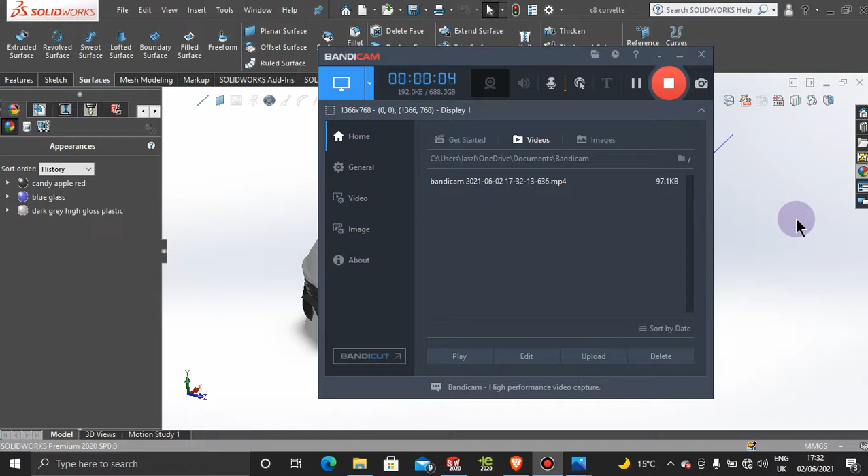Welcome back to C8 Corvette Part 20 Solidworks tutorial. In this tutorial, we're going to create the lower front lip splitter, and then after that we're going to work on this headlight unit here and create the bulbs and these LED strips inside this headlight.

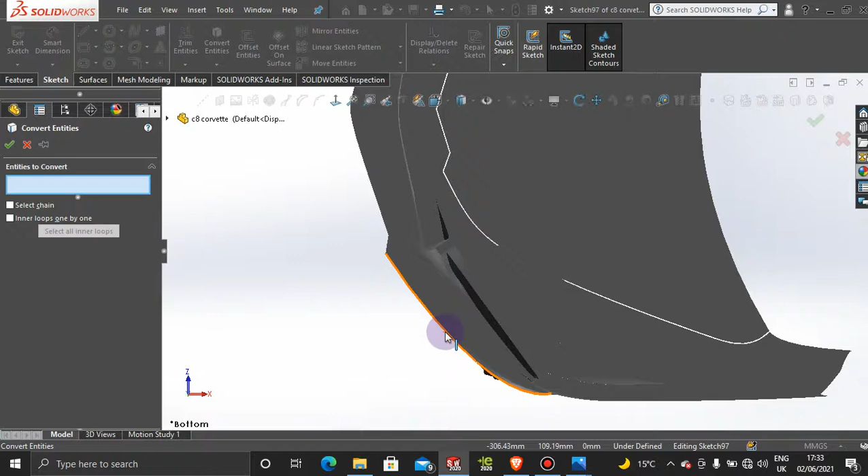All right, so to get started, let's jump to the top plane here and create a sketch on the top plane, and then let's flip into inside out, and let's convert some entities here. So let's convert this one, these edges, and make sure you zoom in here so you grab that small piece in here. Okay, and just jump to this side here and then press OK.

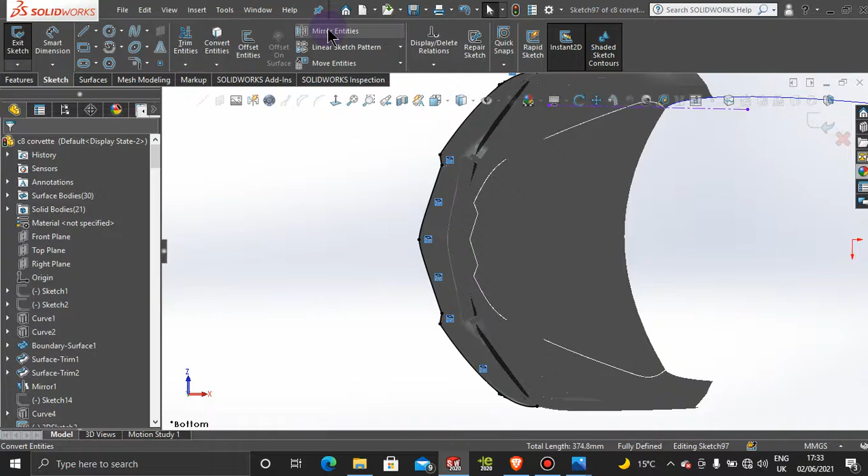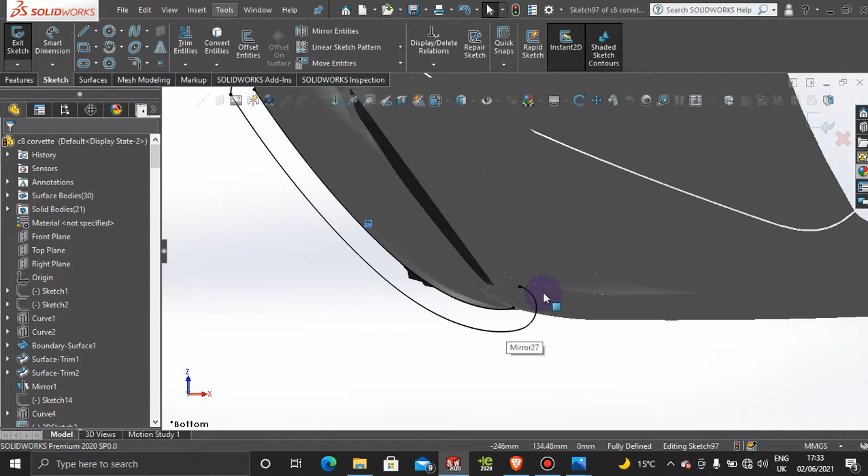And then once we convert these edges, we're going to do an offset. And for this offset, we're going to do a box select, and then we're going to reverse that into 10 millimeter. And what? Let's try a 7. Okay, so press OK, and then you're going to come down here, and then I grab a spline, bring it up to this point, and we're going to add a profile to that curvature.

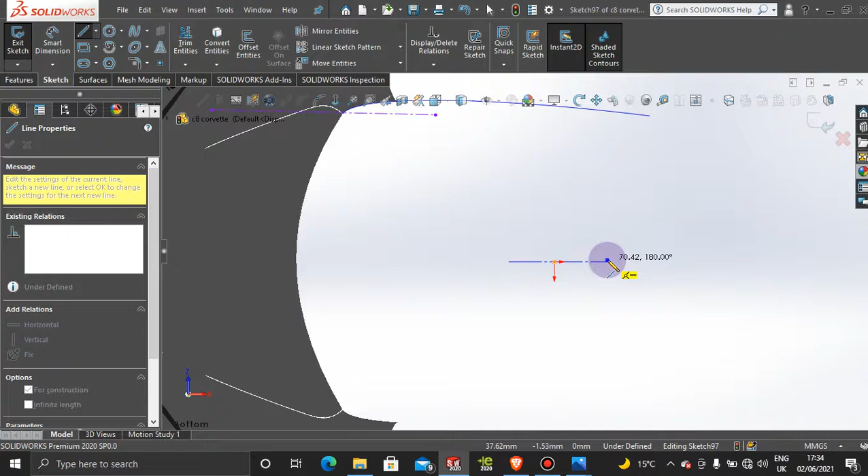All right, and then let's grab a center line, construction line, and then we want to snap onto the middle, and we're just going to mirror over this curvature over this construction line here, and just come in here and snip away some extra curvatures that we don't need here. That's okay, don't worry about that, that won't do anything.

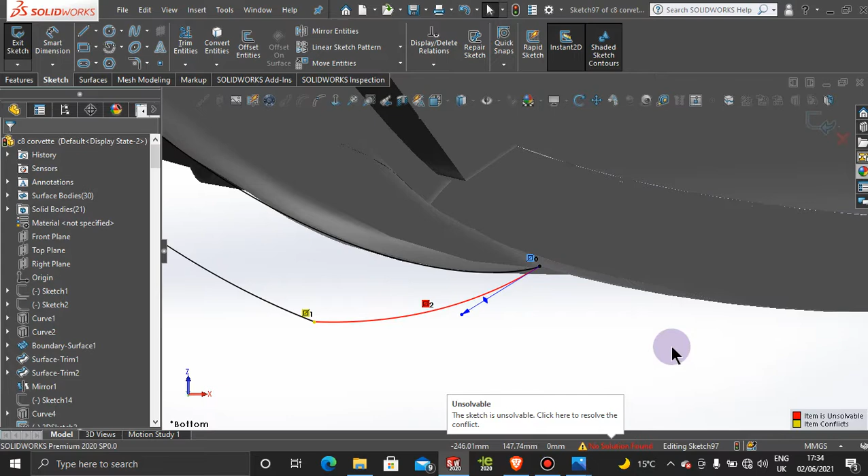Okay, exit the sketch, and then let's come to the front section here.

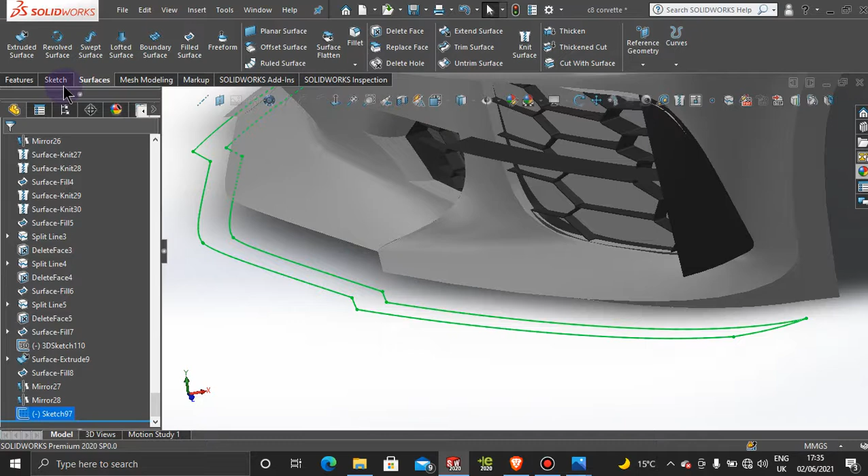Okay, and then in this front section, we're going to extrude these front lower lip section up. So I'm going to do with features, it's going to be a solid object, and then select these contours here and press spacebar, and then just going to pull it down to about here, and press OK.

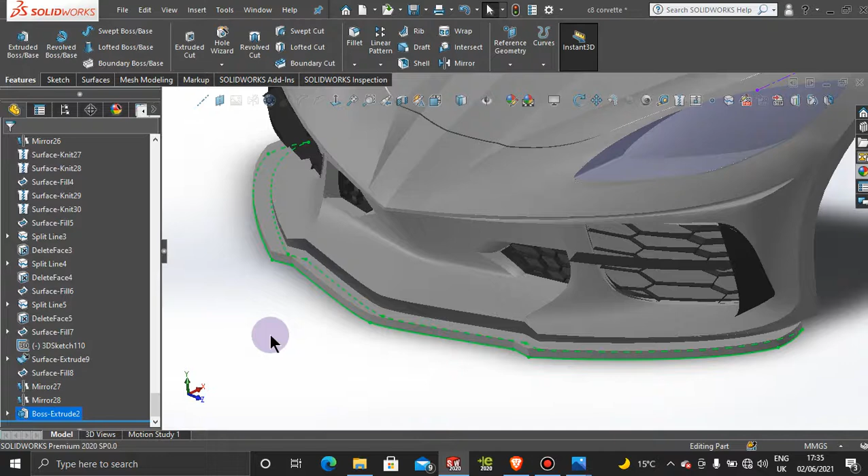All right, so now that we have the front splitter somewhat done, we're going to add a fillet, and let's try 2 on these edges, and 2 looks like it will do the trick for us.

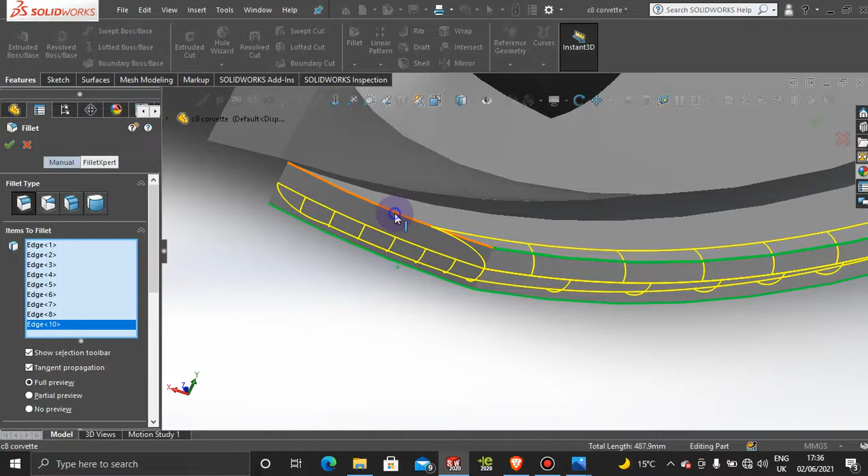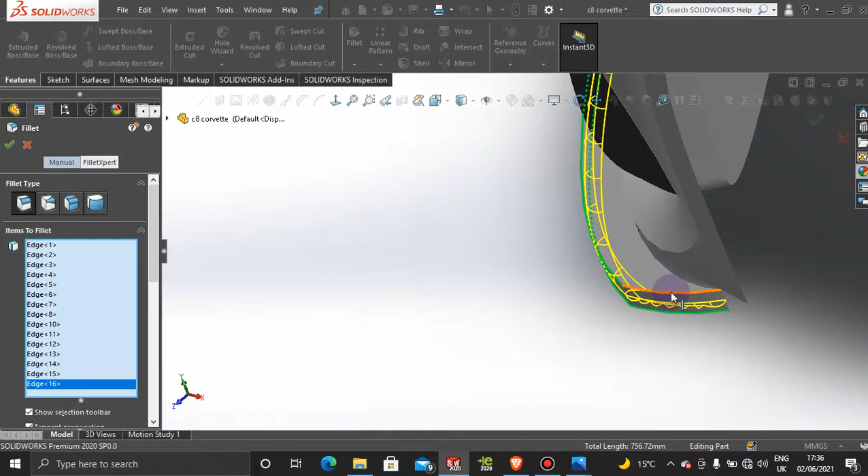Grab that edge as well, and this corner here, and let's see if it lets us do the top section as well. It does, so that's good. So let's go all the way around this edge. And press OK and see what we got.

Okay, so that front splitter looks good to me. And then so we're going to leave this front splitter as is, and then we will add some connecting points to this body later on the design.

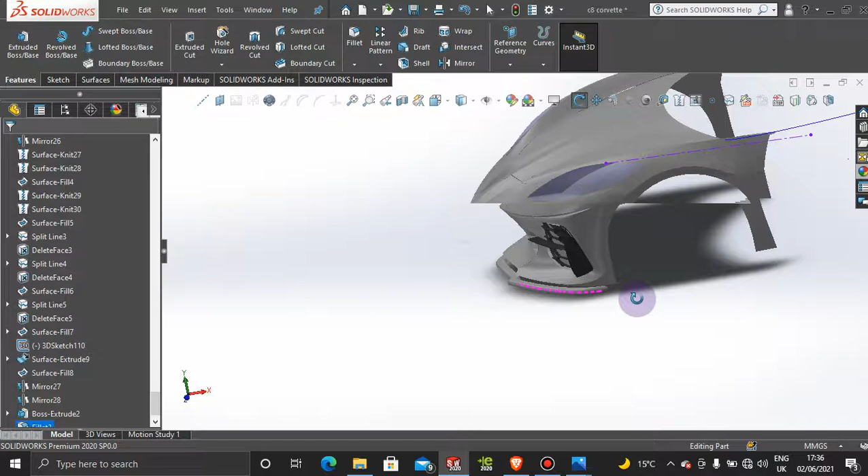All right, so next thing we're going to do is work on this headlight unit. So let's jump up here quickly and find that surface. It's gotta be somewhere down here. So it's a surface fill.

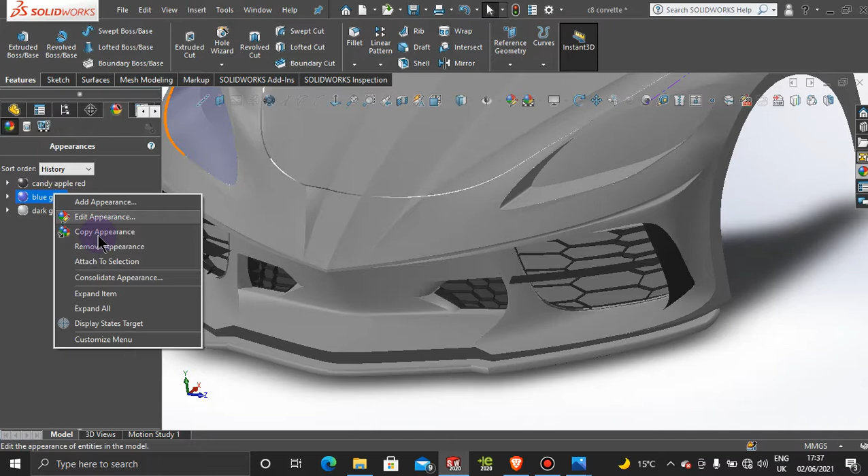So hide that. And then we want to hide from this side as well. So the best way to do it is to just remove the appearance of glass and then hide that one as well. And we will bring it back afterwards.

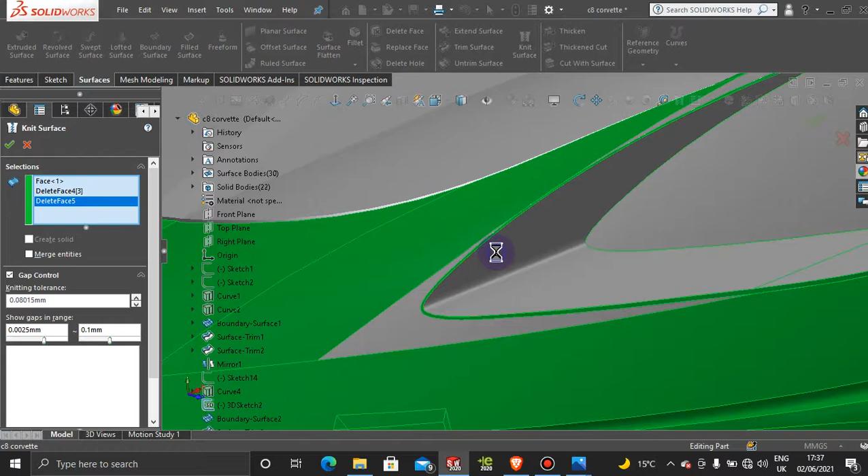All right, so let's try and come into surface here and knit some of these surfaces together. Oh, let's try and knit a small piece to that. Okay, we will come back and work on this later.

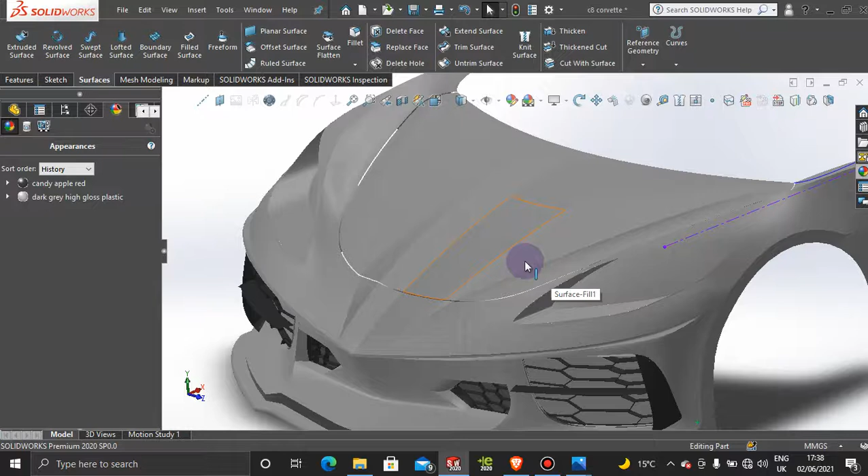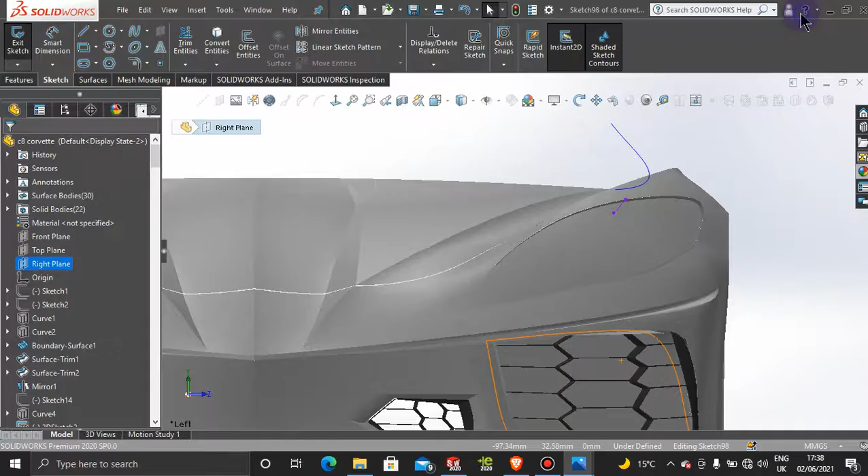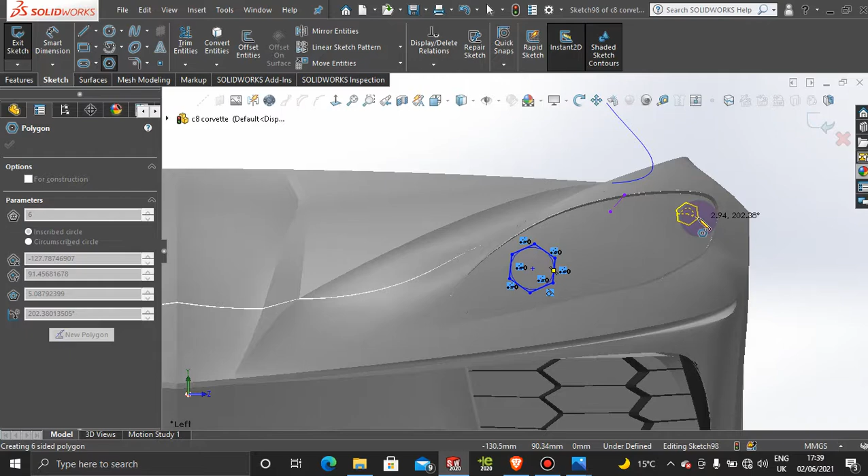So let's create that light bulb. We're going to put that main light bulb beam somewhere out here, about that size. And then the second light bulb will be sitting somewhere up here, something like that.

And let's make that a little bit smaller, about that much. Let's move it all the way down here.

Okay, and now we are going to do a projection curve. And then we're going to project these two sketches to this face. So select the face and press OK.

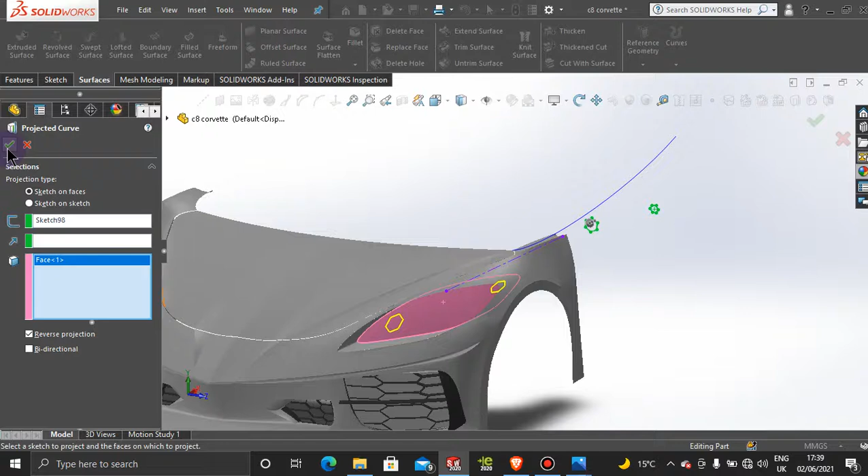And to be able to extrude from this face, we need to use convert entities. So let's come in here and create a 3D sketch, and then let's convert these sketches onto this face. So now they are on the face.

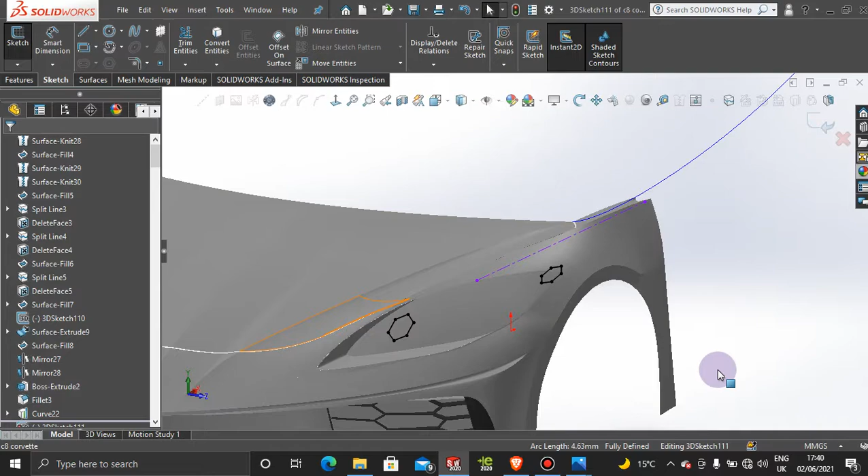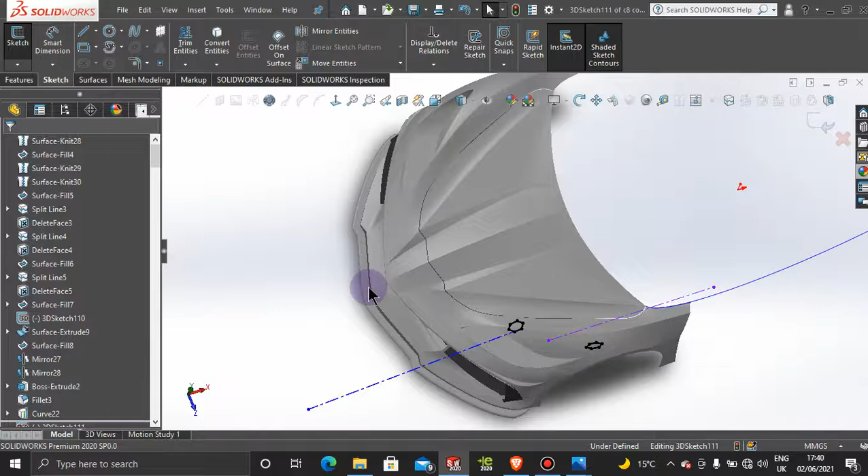And then now we just need to define the direction of pull or direction of extrude. So let's grab a center line, and let's grab from this point out to the air, like that. And let's just adjust the projection of these headlights. So it's pointing straight ahead that direction, so that's good.

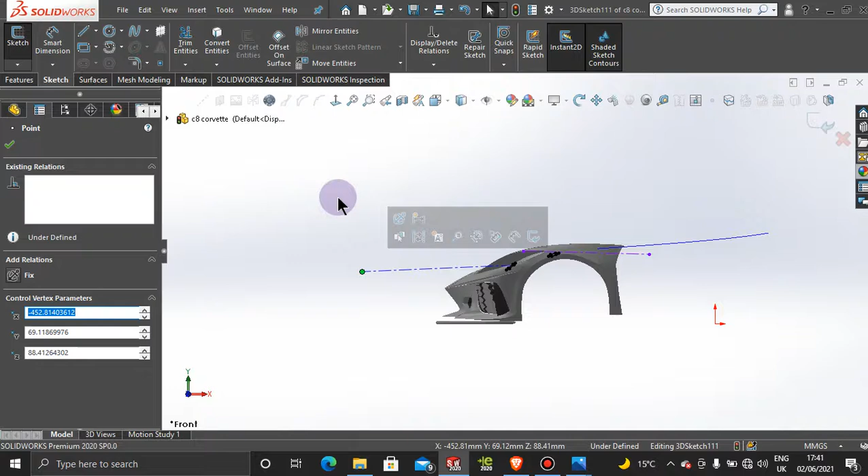Let's have a look at from this direction. It's pointing down. I want this to be pointing forward, maybe a little bit down from the forward, so it's not beaming it to anybody's eyes in the real world, right? So press OK, so that extruded direction will work.

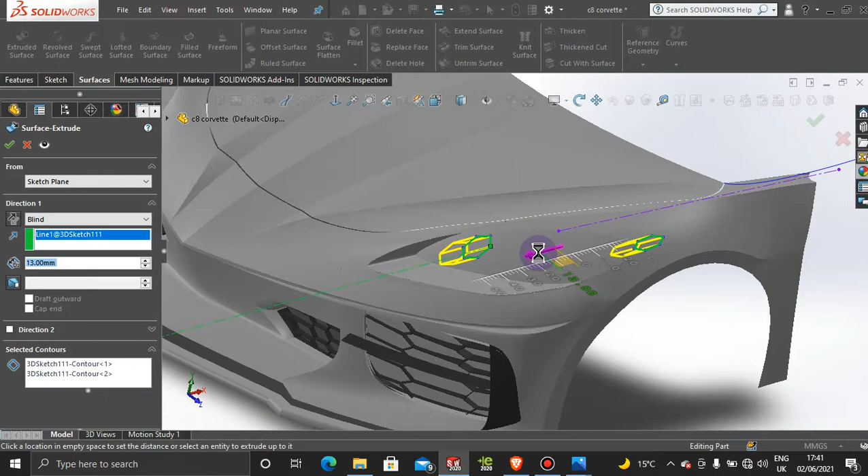Okay, so exit the sketch, and then now if you jump into surfaces and extrude surface, select these sketches. Make sure you come back into selected contours and select the other one as well. And now just click onto direction and then select the direction, which is going to be the construction line, and then we're going to pull these bulbs out to about there. Okay, so press OK on that.

And then we're just going to cap up these boxes. So we'll jump into fill surface here and select these edges here.

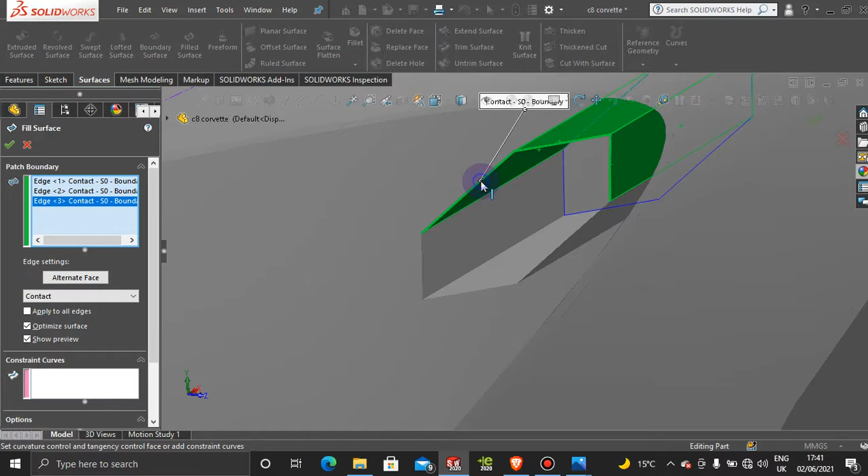Select it like that.

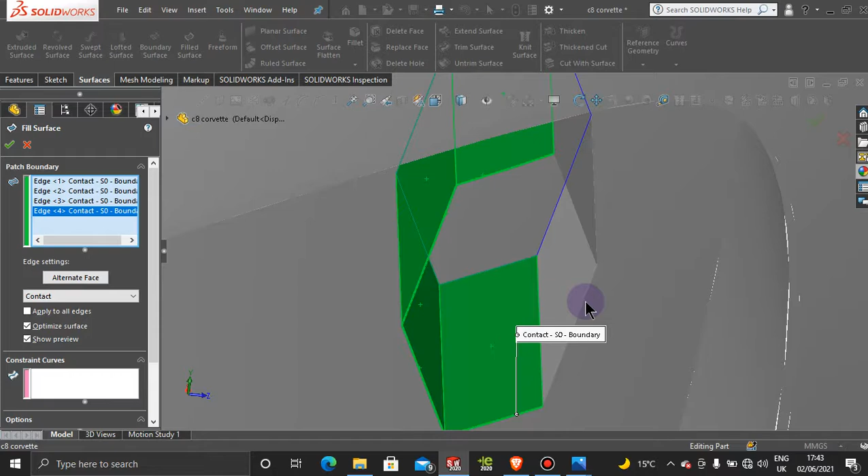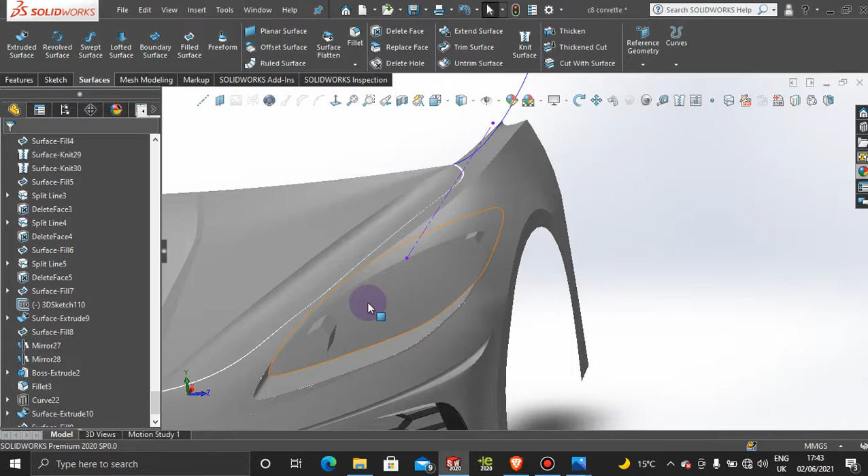Okay, so once you cap these ends up, let's hide these projected curves, and then let's create these LED strips. So one LED strip will go from this angle up to this point, and the next one will go just up to this point as well. One will go all the way from this edge, following this line, the way we can see on this one. Yeah, it's quite following that. However, we can move this a little bit more in, so we can have more space for our LED strip.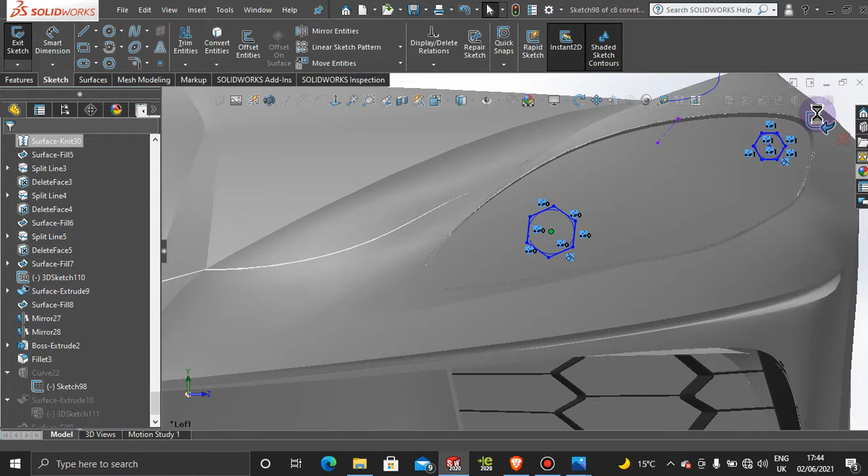So if we come into the actual projected curve, and then edit these sketches, and jump into the front, if we pull this one up to here, and then press OK and exit, we'll pull the whole box up, which is good. So now we have room for the LED strip.

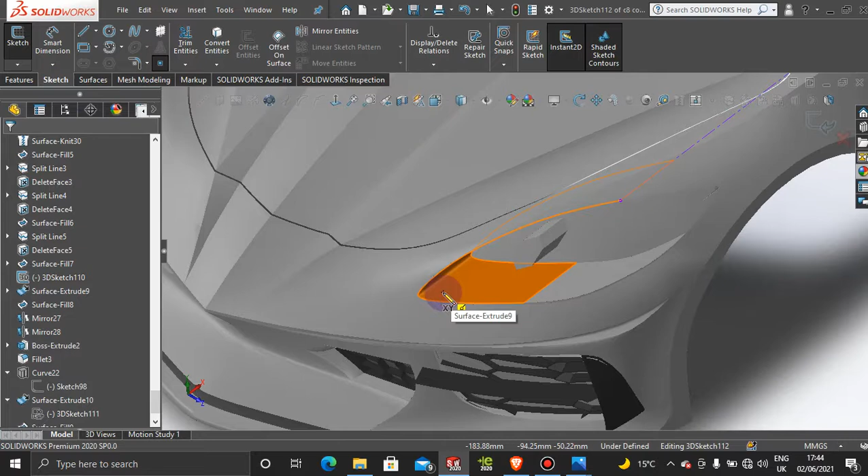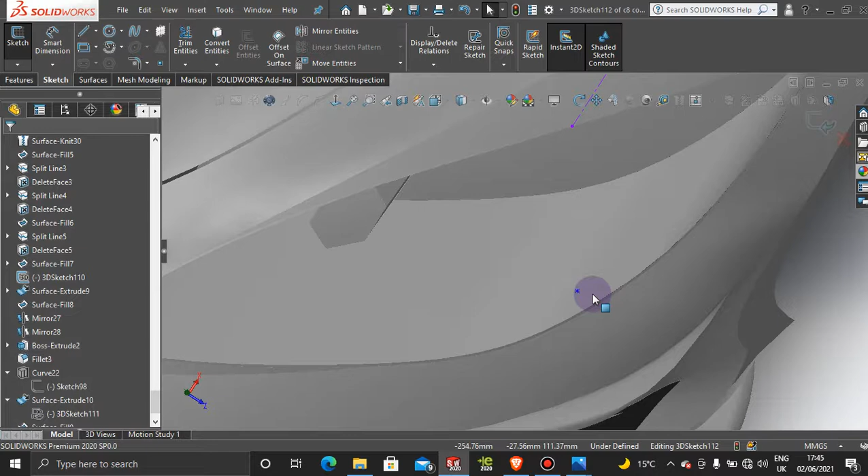Okay, so let's add these LED strips. What we're going to do, which you already know, is grab a 3D sketch, and we're going to grab a 3D point, and we're going to come from this outer point here. So that's one, and then the next one will go from this corner here, this corner here, somewhere. We want to make sure that it's not going to touch, nothing's going to touch our outside surface body. So leave that point there.

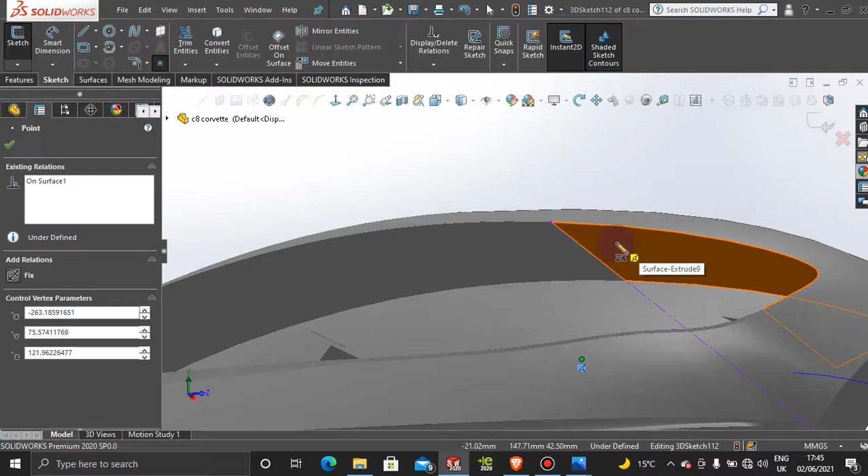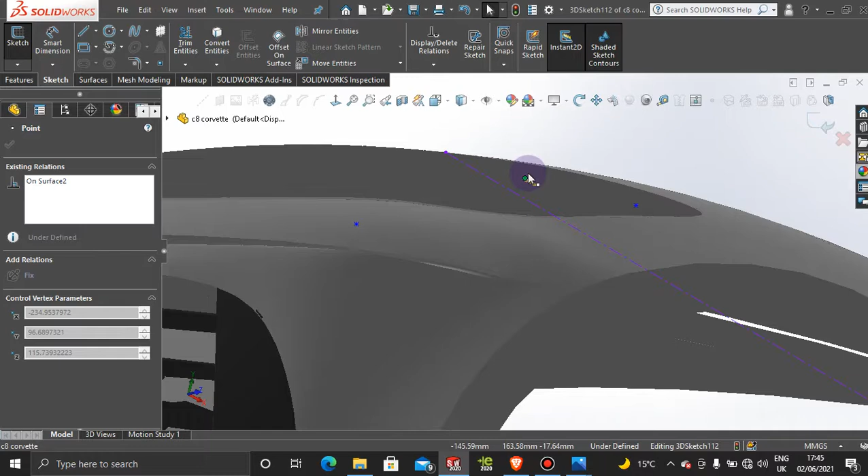So the first point is going up to this point somewhere in here. Let's grab the point and just drop it here, and the second one will fall somewhere there. So press escape to come out of that sketch. So let's maybe pull that, hold control, to somewhere here, and this here.

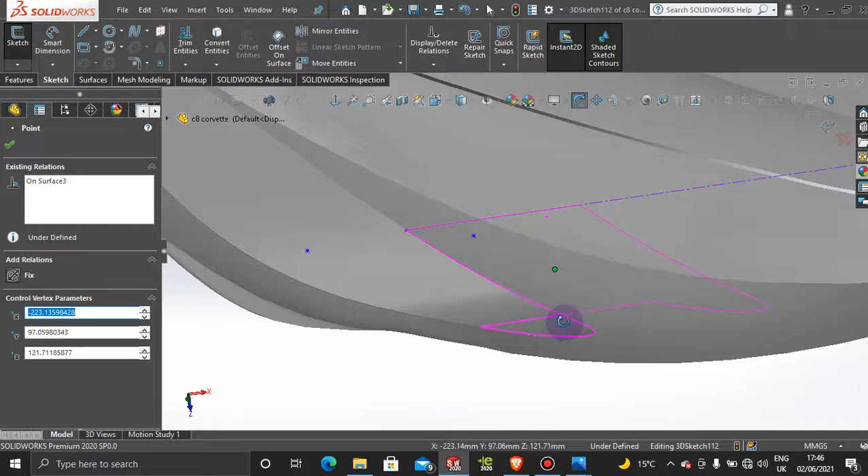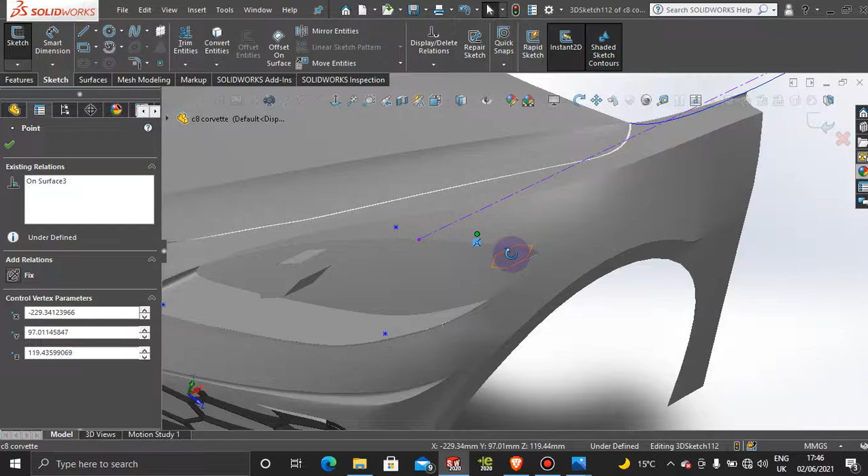Let's get to the top so we can see a lot better how much space we have. All right, so let's get rid of this point and grab another point and drop it here. Now we can see a lot better here. So hold control so we're not snapping to anything. The first one is going to fall somewhere here, the second one is going to fall somewhere here. Let's have a look at the picture. So yeah, they're actually quite close to each other, so let's pull this closer to the other one as well.

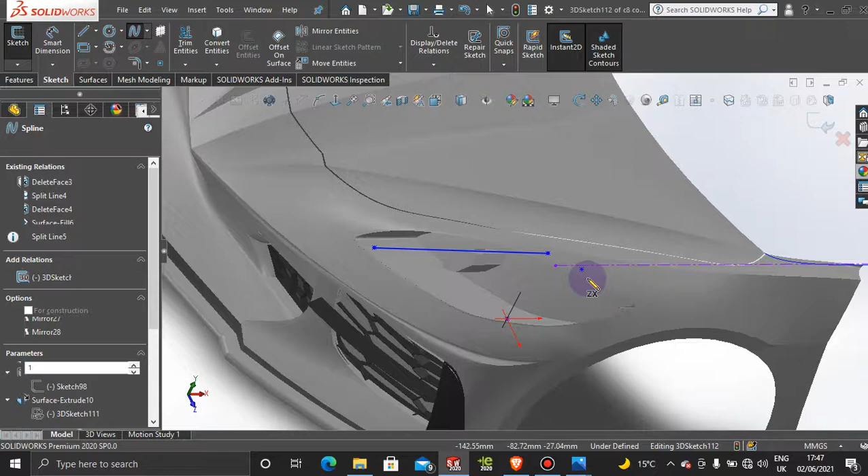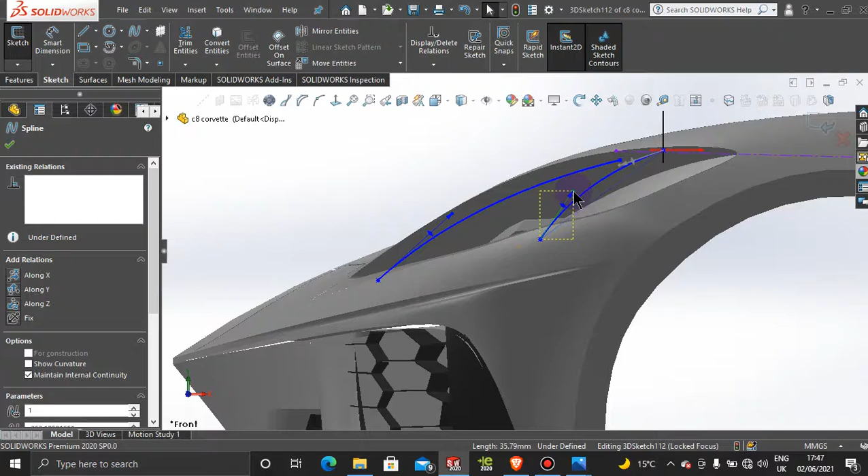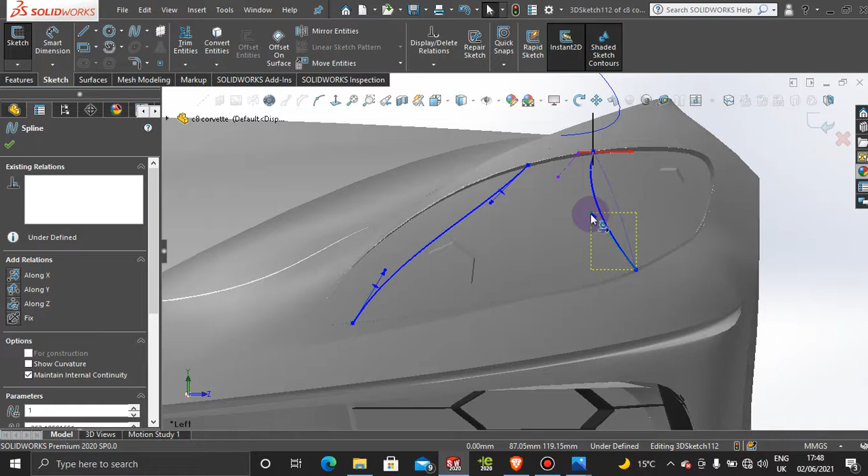So now we're just going to grab a simple curvature spline, and then we're just going to connect these two dots, exit the sketch, and then connect these two dots here. Now we just want to make sure that our profiles are correct, so we don't want to touch the outside perimeter. So when we put back the front face cover, it's not going to touch that headlight section there. And we can also always readjust it after. So that's the first curvature, which runs all the way up on this angle here to this area, and that will somehow curve into that area there.

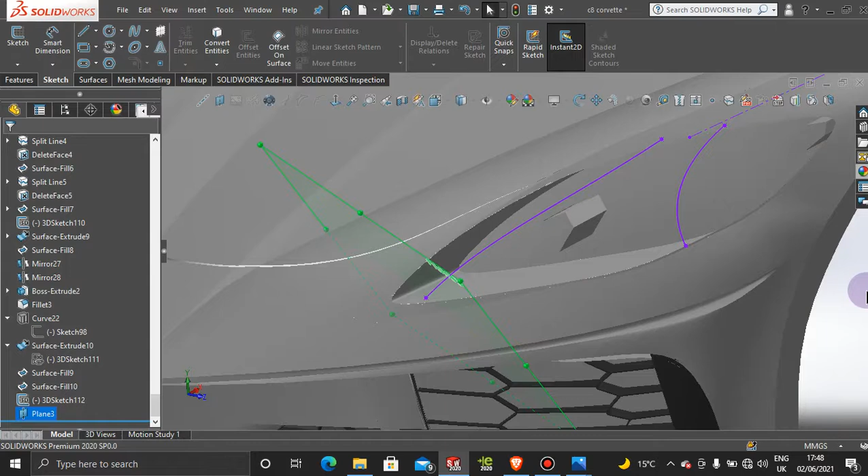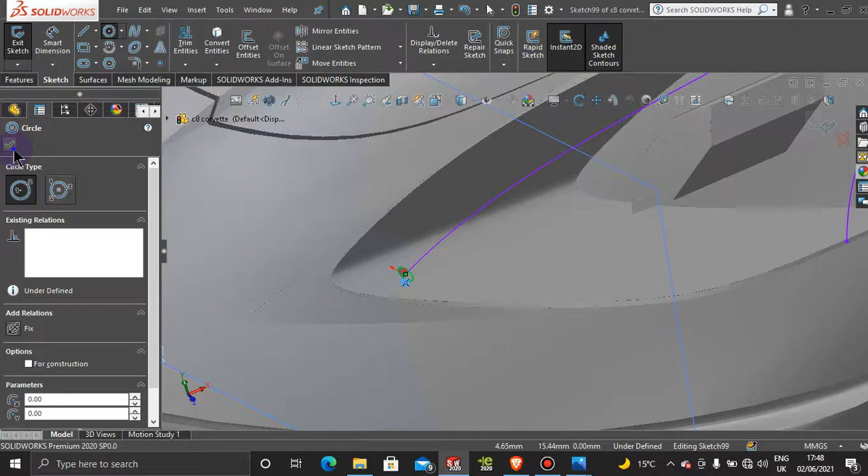Okay, so exit the sketch, and then let's grab a plane, select this line and select this point, and then let's get on this plane three that we just created and select the circle, and a circle about that size. We can also adjust the size of that circle always. And then let's jump into surfaces here, grab a surface sweep, select this circle and select the line, and it registers for us in that direction. And it's not in the way of our beam as well, so that's good. So press OK on that.

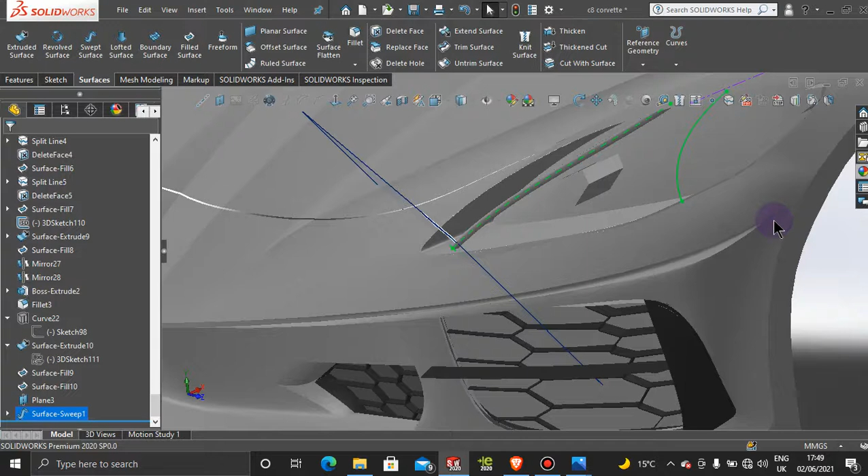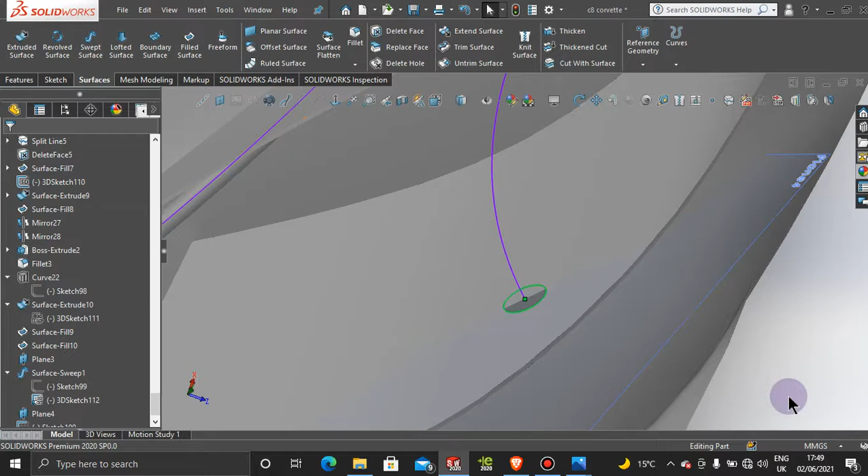And then we want to bring back that 3D sketch, so bring that back, show, and then let's try to add a plane onto this line as well. So select the line first and select the point. And then we want to make a circle on that plane that we just created and onto that point, about that size. I'll jump into surfaces, sweep surface, select this line, and then select the line. And then obviously it's not going to let us do it. So we're going to have to hide this line.

I'm going to hide this line here, and then hide this circle and hide the plane.

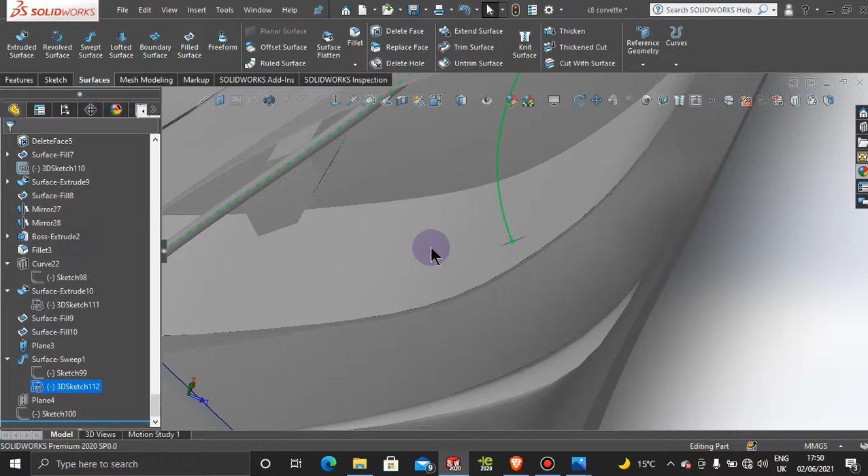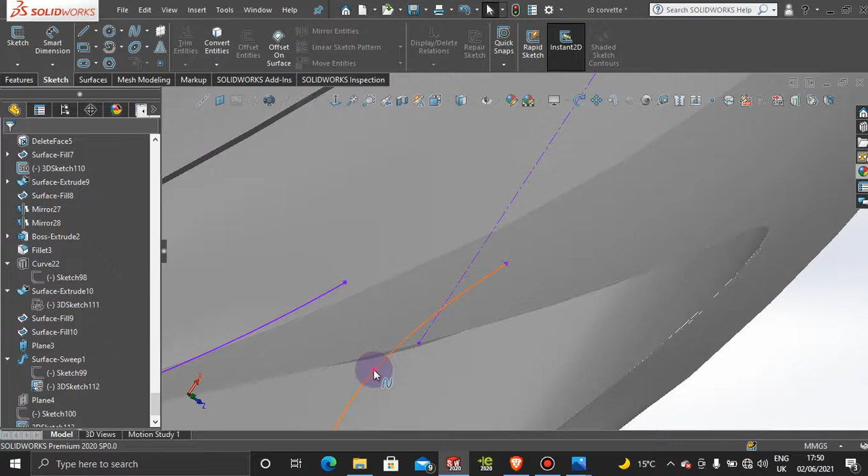I'm just going to bring back this line for a second, and then we're going to grab a 3D sketch, a 3D point, and add a point to these edges, to these points. Press OK, exit the sketch, and now we're going to hide this line, and the points will stay in place.

All right, and now we're just going to add back that curvature. So 3D sketch, 3D curve. And we're just going to add back our profile to this curvature.

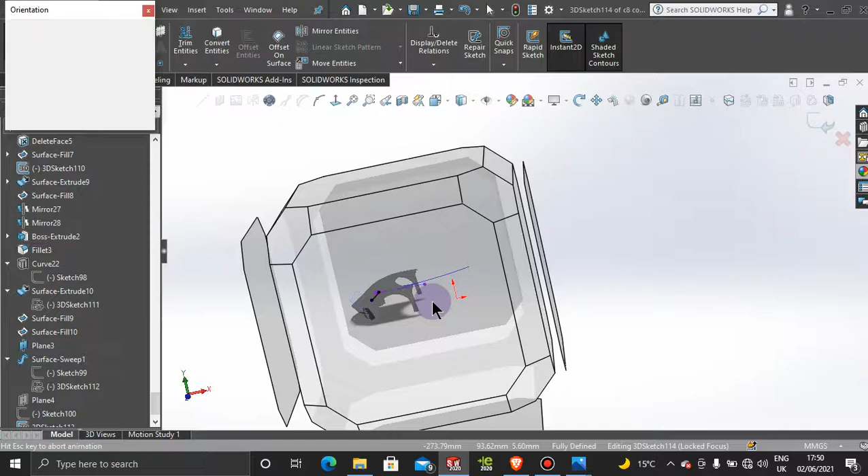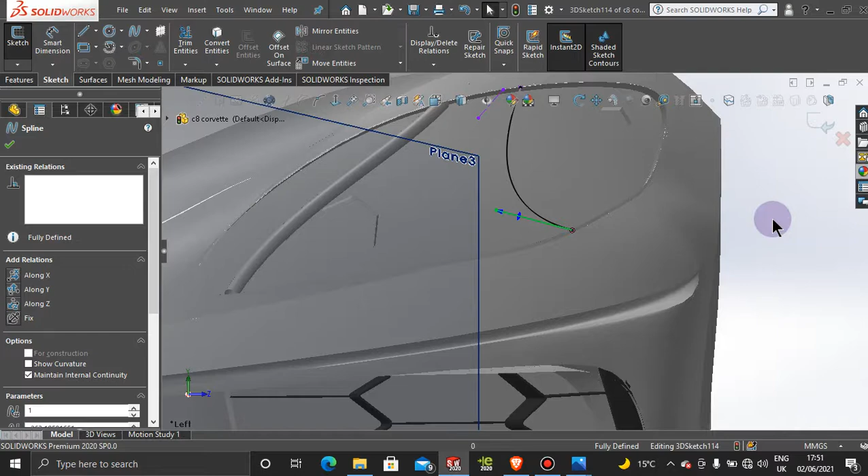This angle, and we are not touching the outside perimeter and from the front. It just curves down that way. Maybe that's too much curvature, but we'll see. Yeah, maybe it's a little bit too much. So let's pull back a little bit. That's perfect. Okay.

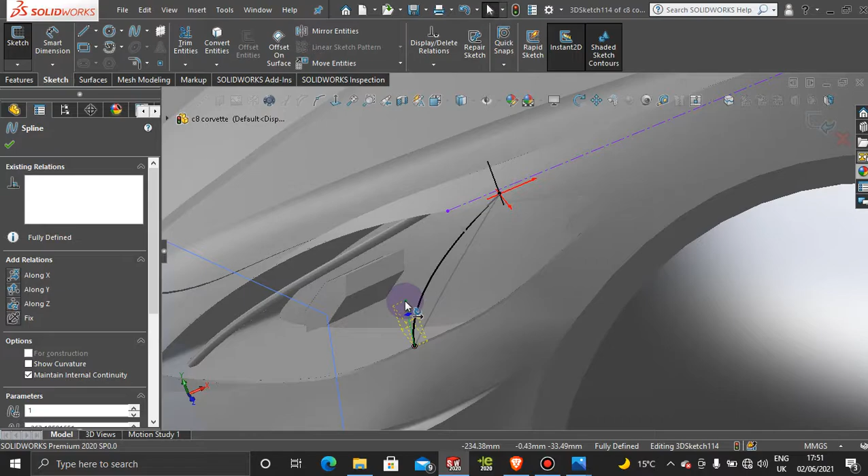And then let's just check again our profiles. And this all looks good. Okay, so let's exit this sketch.

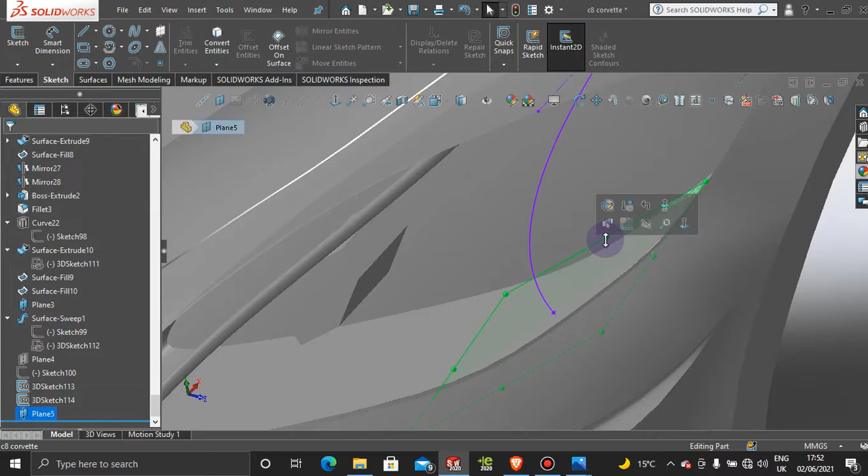And now let's grab another plane here and select the line and then select the point. We're going to make a sketch on this plane, of course. And then we're going to make the circle here about that size. And let's just make sure that we are on the same size as the other one.

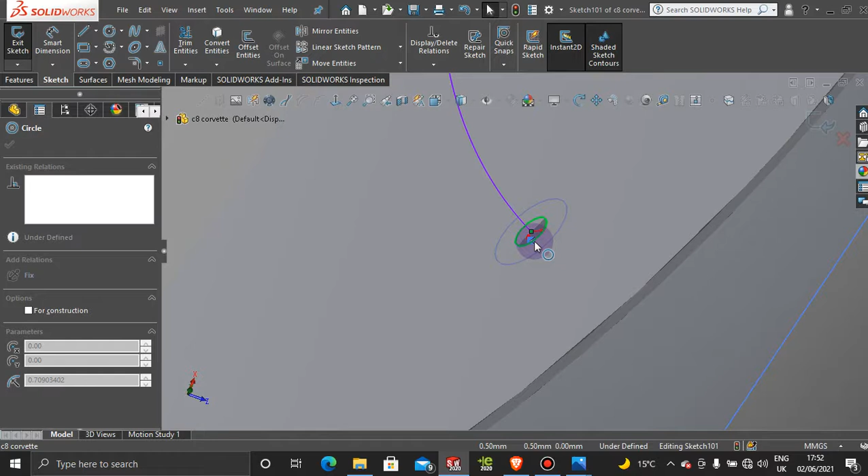If you want to be exact, you can always add dimensions to the other circle, and then you will have the same size on both. I'm not going to do that.

So jump to surface and swept surface, select the circle, and then select the line. Select the line. Now it's registered, so we are good. And then press OK. Okay, so now let's hide these planes.

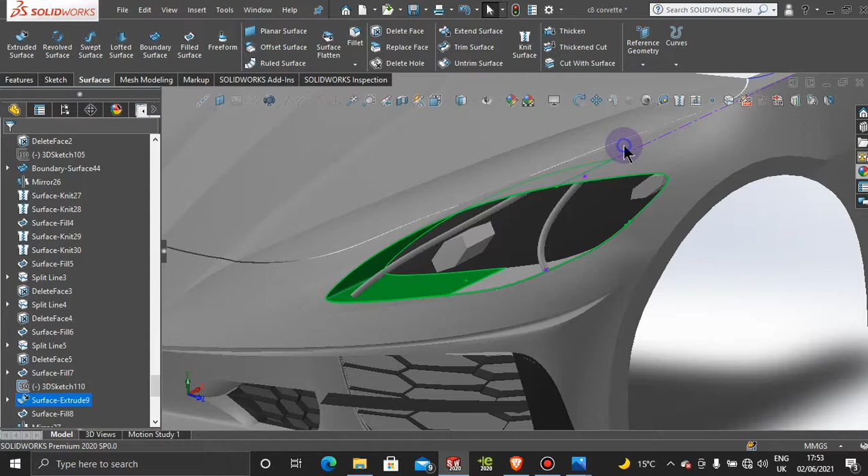All right, and now we're just going to add this black appearance to this inner face, inner face, and this other face here. And then... is going to add to this one. Probably not. Okay, we're going to add lights on those ones.

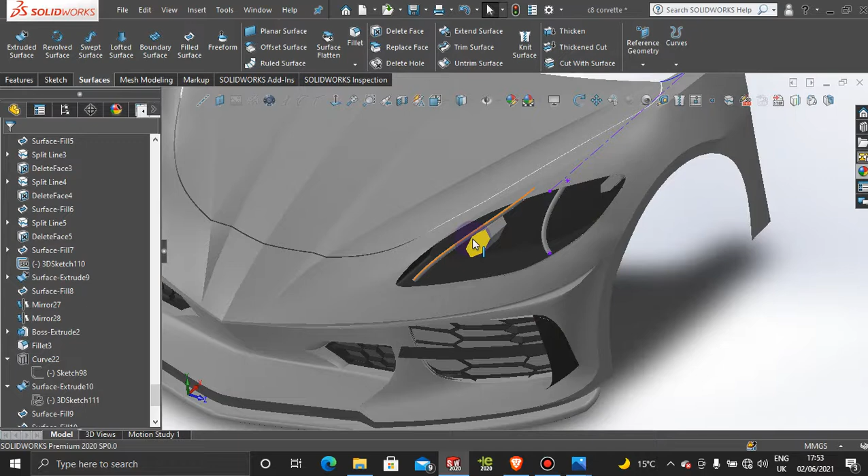So let's add some appearances. We're going to add yellow on these bodies here, and then copy this appearance, copy appearance, and then paste.

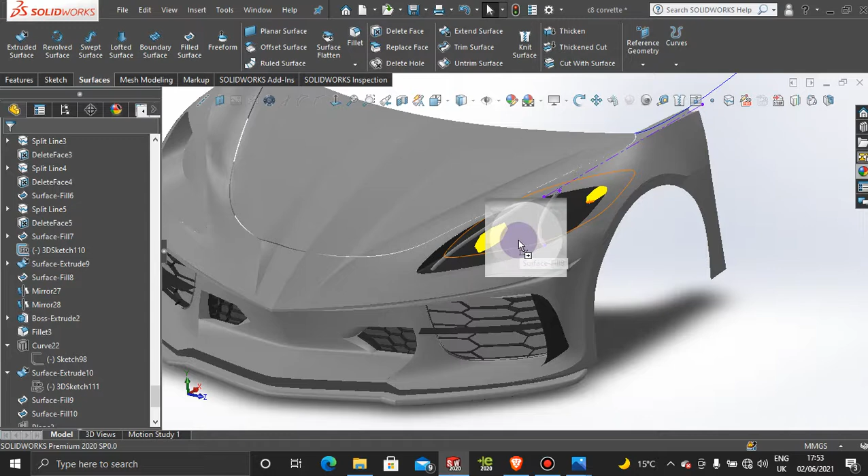We're going to add to this one as well, and we're going to add white to the amber red, the white to these swept surfaces here. So copy that appearance, copy appearance, and then paste onto that one.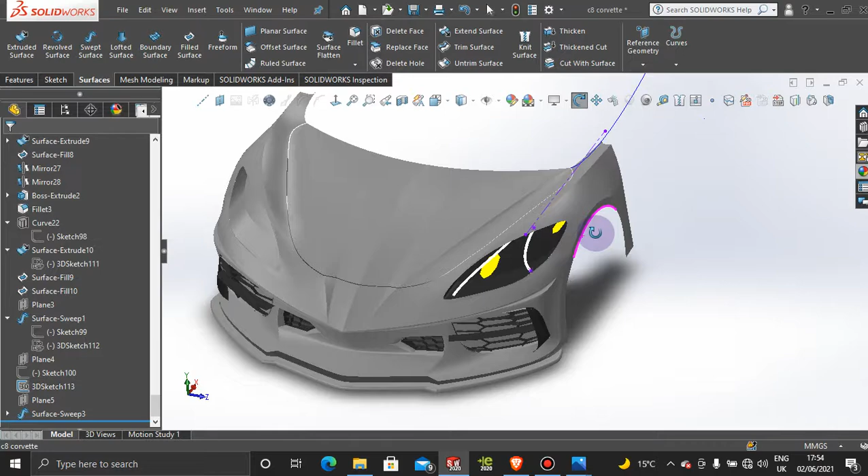Okay, all right, so that looks good. You can always adjust it for yourself the way you like it, or you can just go exactly how it is for the Corvette, but I'm more happy with this idea.

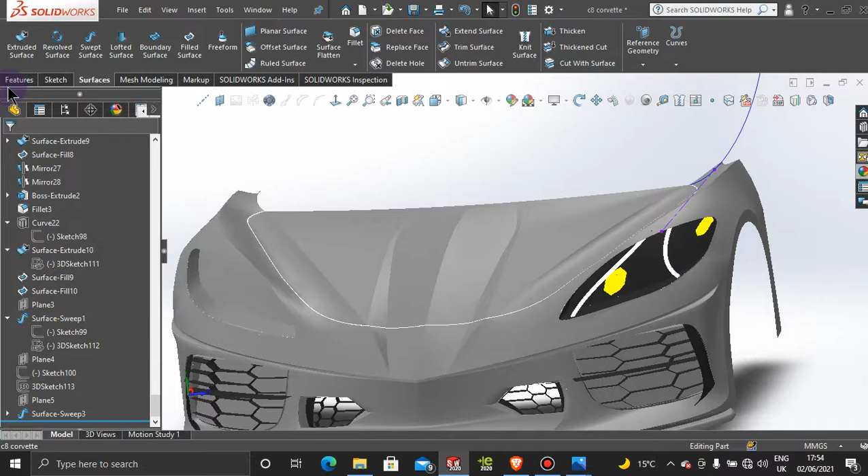So let's mirror over some of the bodies that we just created. Let's jump to features, mirror, and then we're going to use the front plane as always, and then select the bodies to mirror. So let's select that one, that one, that one, and that one there. That's okay.

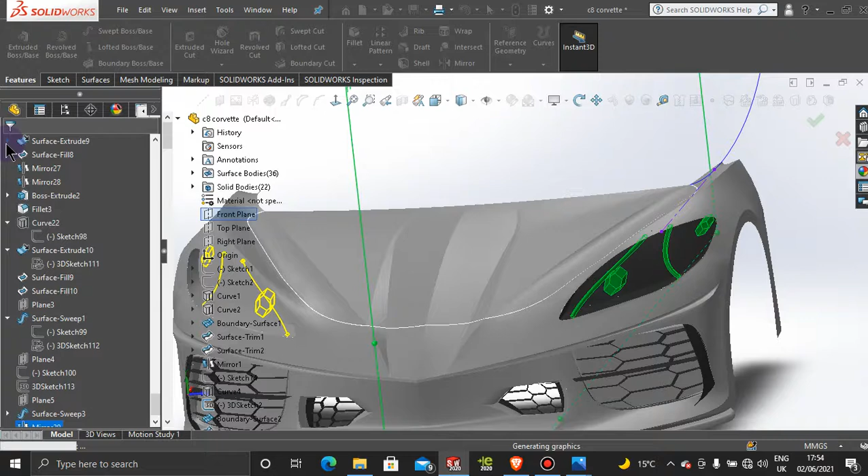And let's add our appearance, copy appearance. Okay, and that's good. That looks good. Perfect.

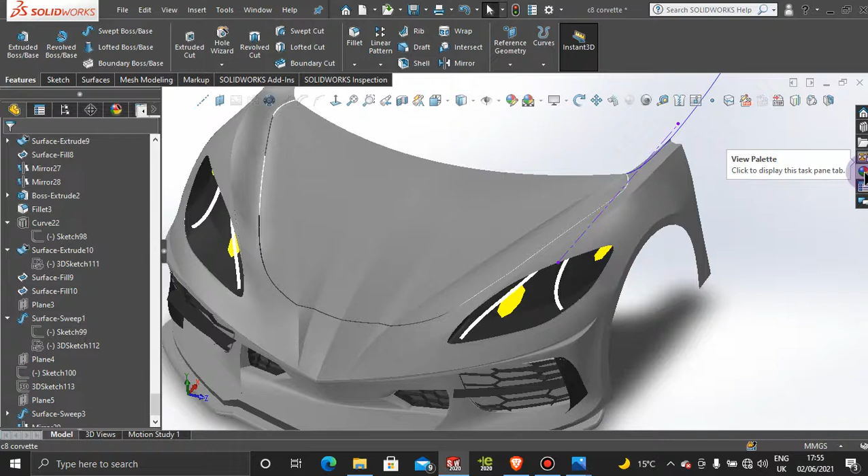Okay, so it's going to be a lot better when, obviously, we can also change the appearance on that yellow to a different color.

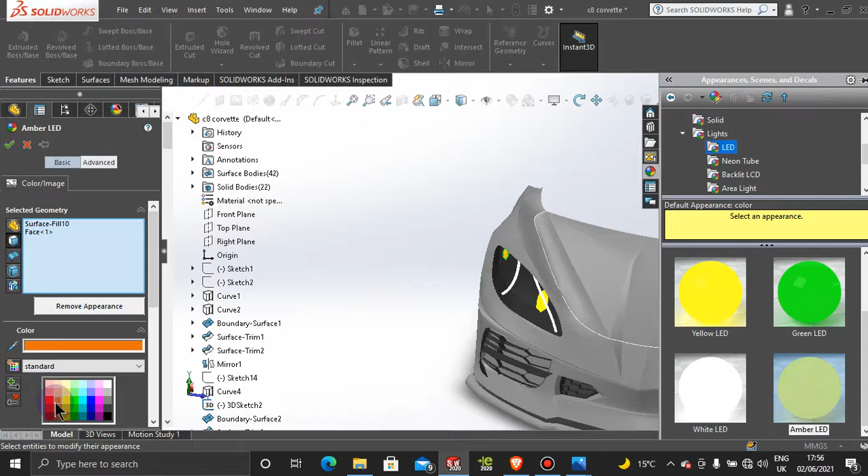Okay, I come in here and then copy appearance and add to the front section of it. Okay, that looks good. And then we're just gonna come in here and check our amber, and then we're going to edit that appearance to a more deeper orange color.

Let's try red. I come down here and then... that's it. That's the one we need. Okay, so that looks good.

And then now we're coming back into here, and then we find that front glass, front face, and that was a mirror 28 on this side. Show. Okay, mirror 28. That one there.

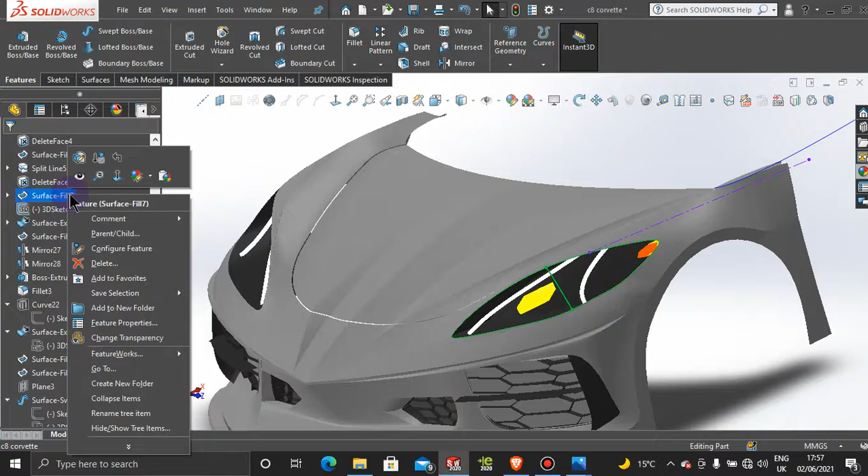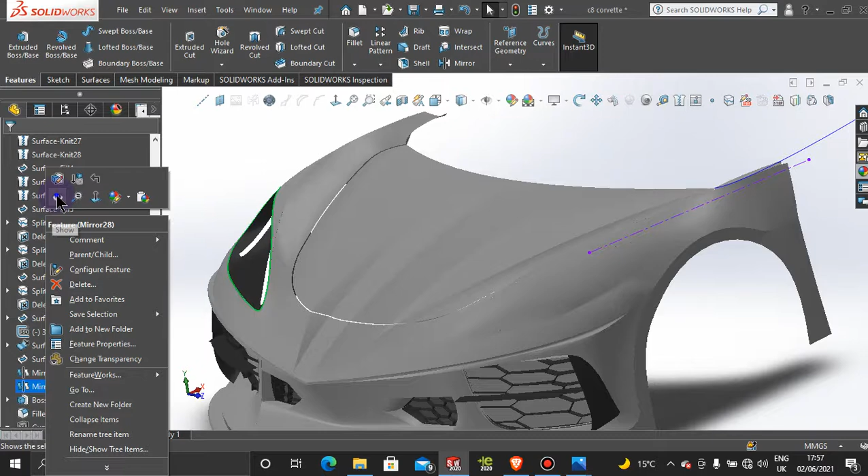So it's face delete, no, this surface fill 7. So show that. And then mirror 28. I believe mirror 28, or mirror 27, mirror 28. Right. Show. Okay, so it's not registering.

We can always mirror this over again. So mirror, let's use front and then bodies to mirror this front section. That's good.

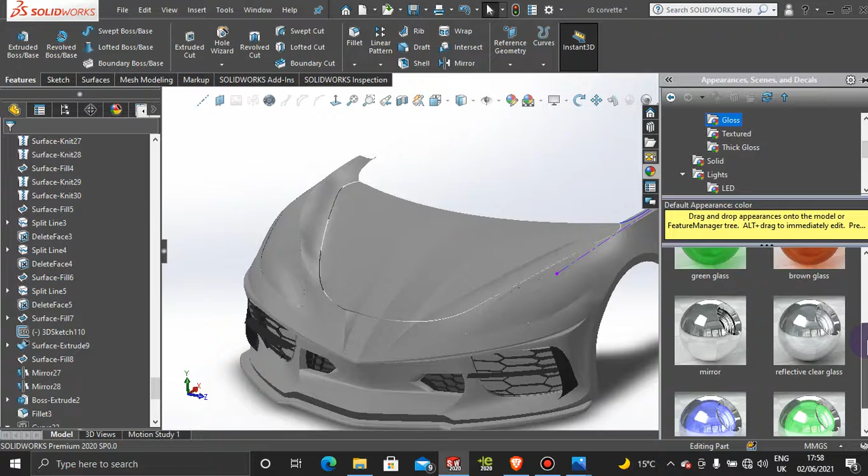All right, so now let's add an appearance to that front face. So jump into glass here, and then appearance, and then glass. And let's try a thick gloss. And then we're going to choose clear or gloss. Let's try gloss. So let's try a reflective clear glass, because that's usually what headlights are. So let's choose that. Reflective clear.

That face as well. So there you have it. We have our headlights on this vehicle.

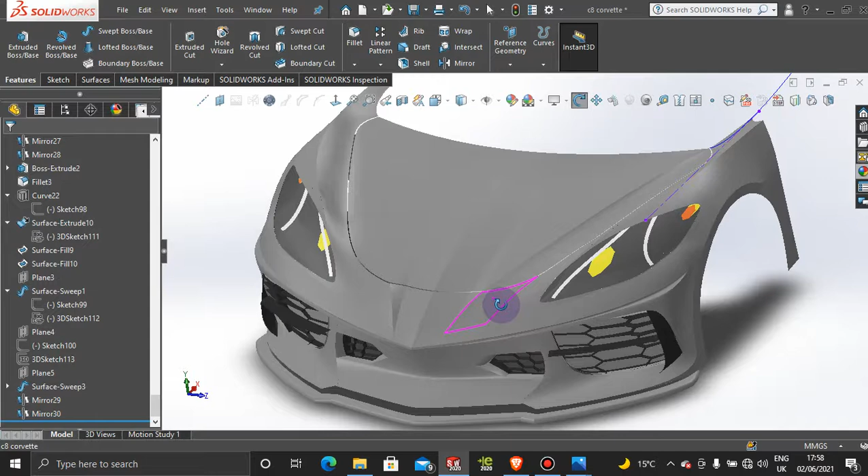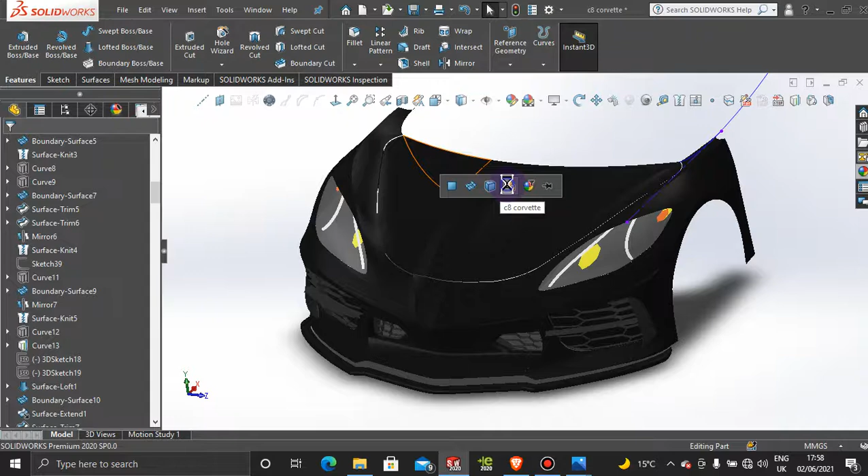Let's go and add an appearance, plastic. Let's try high gloss. Let's just do some darker color on the car, like black. Let's try black on the car.